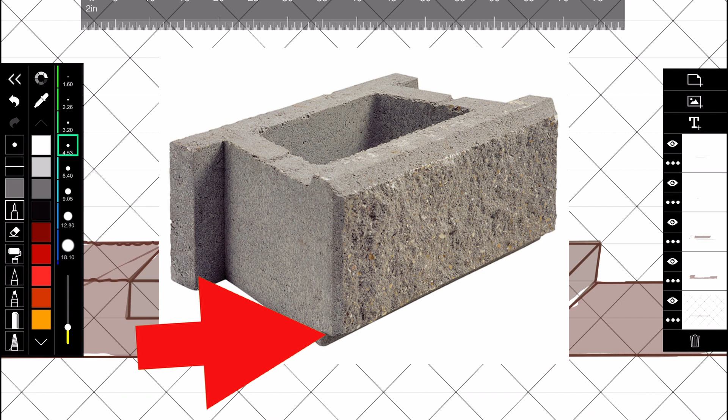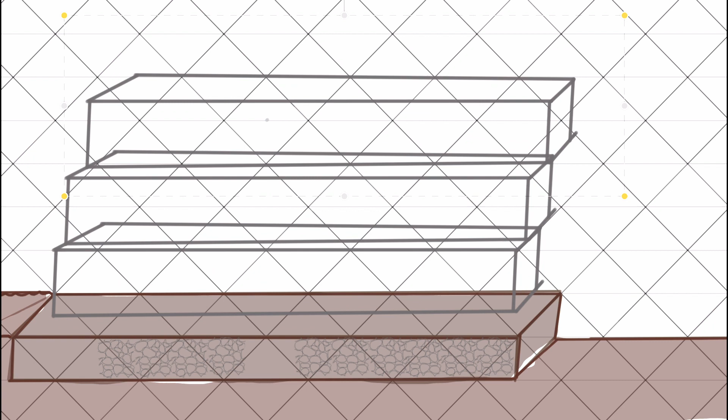This essentially is this little lip, if you will, that it has at the end or maybe at the beginning to actually create these angles for this type of wall. Now, these are the kind of walls that need about a 12-degree angle. This is the leverage of total unit mass with simple mechanics to make highly stable gravity walls. And that is very important if you are going to be tackling this type of project.

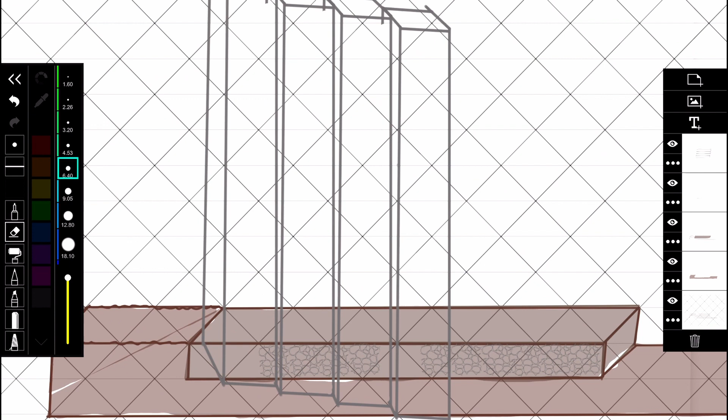Now, one of the things that you definitely want to consider is the reason why you would need this wall, if it's in your front yard or your back or anywhere else around your property. The purpose of these walls is essentially to create a flat and or level area, be it at the top or the bottom. This is going to be primarily if there's a big enough slope where you may need 1, 2, 3 or more walls.

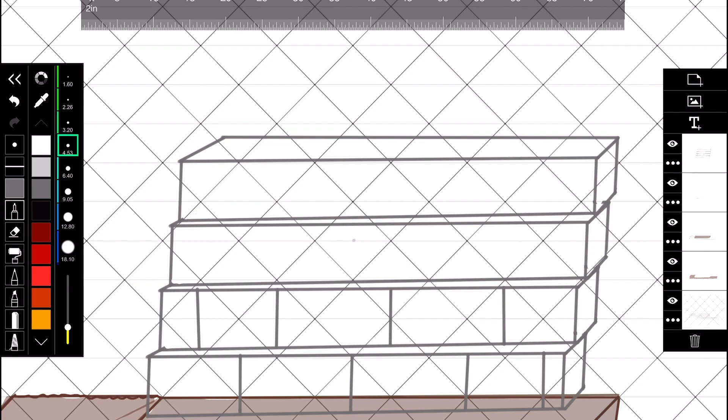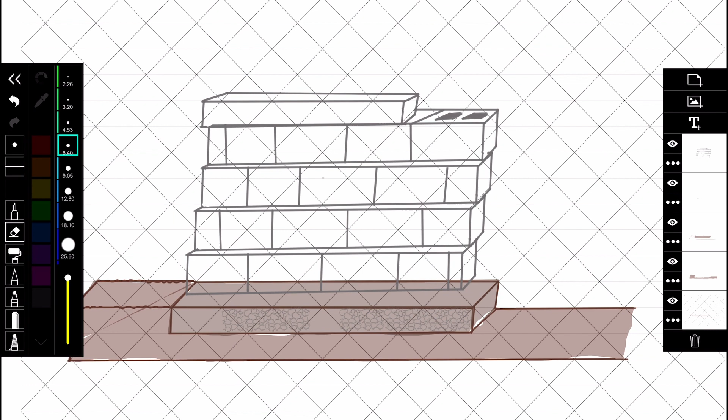But generally what you want to think about is the length and also the height. If they go above 4 feet, in most states you are going to be required to have an engineer come into play and design the wall itself. It's obviously going to depend on a few different factors, but keep in mind that you definitely want to talk to professionals about the walls.

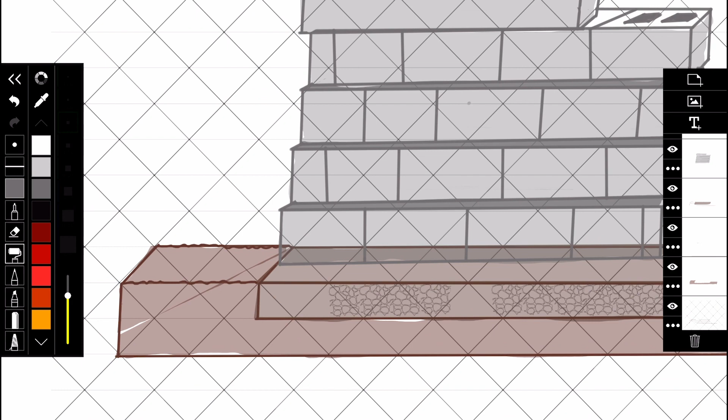It doesn't mean that there's not going to be some type of engineering or design involved. It just means that there are going to be some more steps if you decide to put in a wall that is way higher than these measurements. Some of the things that you also want to think about is when you are doing this yourself. I am drawing here something that looks like the design of the wall itself. Now, this is not the only one. There are obviously many out there that you can look for, including the videos I mentioned earlier on YouTube.

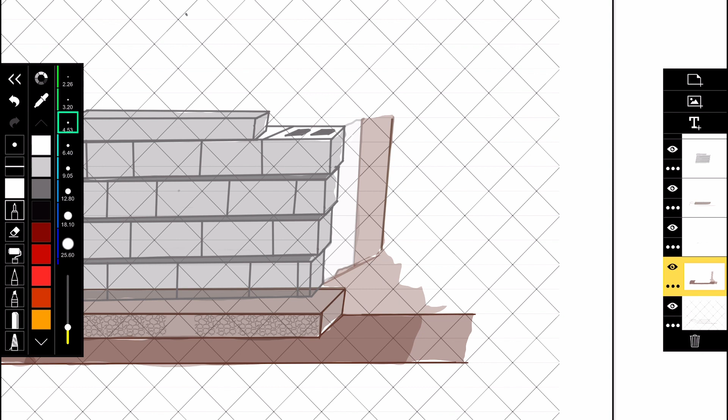So you definitely want to think about your existing soil, where you're going to have to put a base, and then on top of that you are going to be putting your rows of block, and those rows of block are going to depend on what height you are looking for, and you're going to finish it off with a cap. Then behind it you are going to have a drain pipe, a liner and or fabric, some backfill structural 3/4 inch granite of some type, and of course your backfill soil.

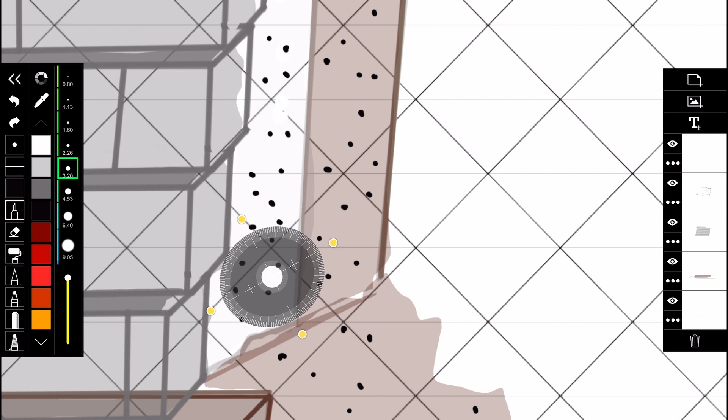Again, it's going to depend on your needs, so you may need to have 1 or 2 walls to create this flat surface on top, or the other way around on the bottom part. But this is ideal if you want this area to be flatter and if your property requires it. Parts of the country are definitely going to need that, especially if you live in an area where there are a lot of hills, especially in the mountain areas of the states. But this is in general what you are looking for.

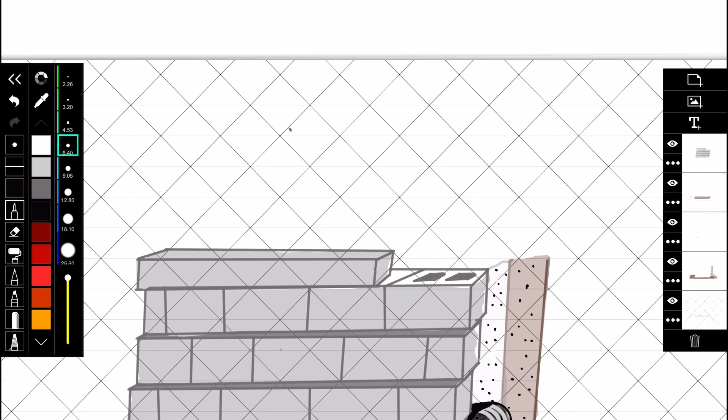Now, of course, when you are designing, you are going to think about how much space you need and what you are working with. Every single project that I've worked on is always different, and even though some people may think that they require a large wall in height and length, sometimes they actually don't. So it's going to be a case-by-case scenario where you may actually need this or may not. So it's going to be important to contact your local designer who will be able to help.

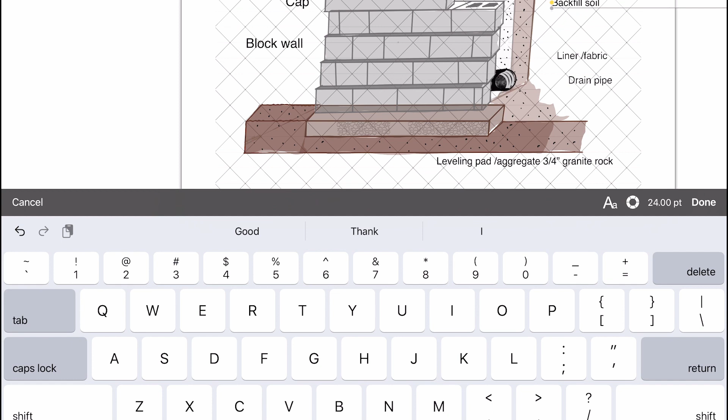Of course, I'm just giving you this information. This is one of those things that's a little hard to tell just by looking at a bird's eye view. You definitely have to be there. You definitely want to know what you're working with and the purpose behind this. Of course, that comes with a lot of other details, the bearing weight and more stuff like that, including the materials that would be best suited for your area. I hope this gives you some ideas as to how you would approach this if you need to do this.

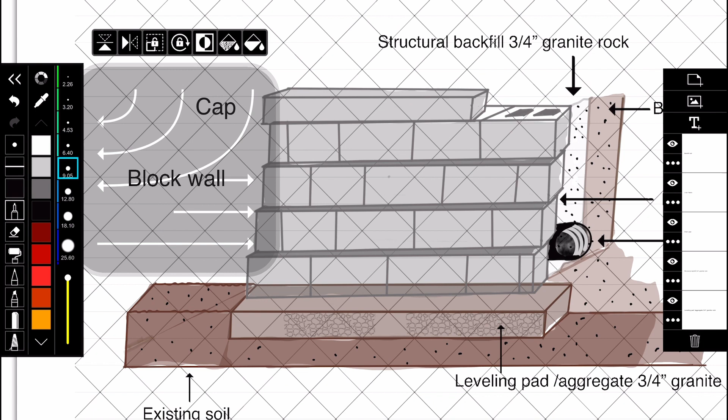At the beginning of the video, I did put some footage of some of the projects that I have been involved in as far as creating this type of wall in this type of landscape.